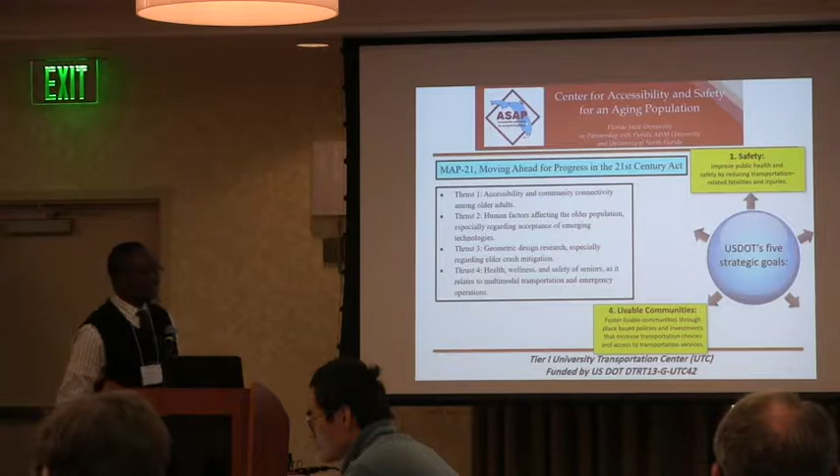I don't know if you're familiar with the legislative acts, but to get money in transportation, Congress has to pass those bills. The first one we got our funding under was called MAP 21 in 2013. We applied and focused on 2 of the 5 areas: safety and livable communities. Based on our proposal, we focused on 4 areas of research: accessibility, human factors, geometric design, and health. We focused on that, and based on it, we actually did our projects.

Our center was based on a very strong peer review of proposals. Each proposal had to be checked against all the MAP 21 requirements. You can see each of the projects had to satisfy at least 1 or 2 of those criteria. The reason is that we are engineers primarily, but we need to work with other people to accomplish this. That was the first cycle.

This is the second cycle, and we just show you a sample of projects. Some of them had other parameters that were not part of the formal requirement, including things like emergency evacuation, innovative transportation strategies, and improving methods for simulator studies.

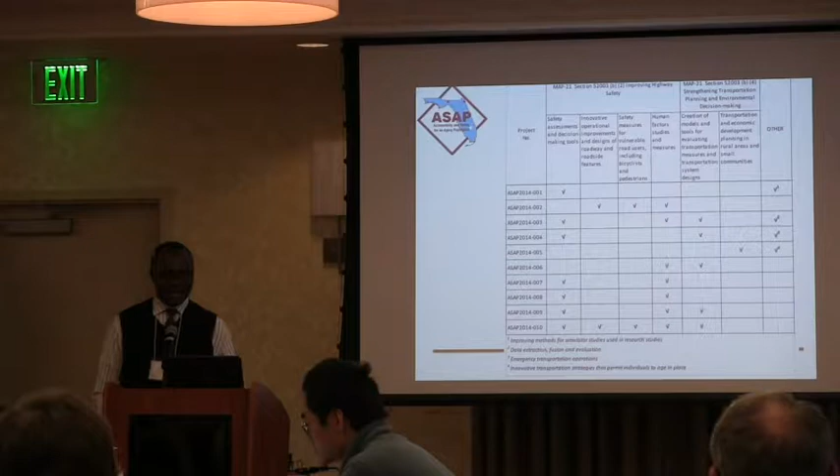So we went from MAP 21, which was enacted in 2013 and expired I believe in 2015, to the new act called FAST, the Fixing America's Surface Transportation Act, which gave money for new centers and for spending on transportation. We remain with the 4 thrusts of research areas, but overlaid it with new priority areas, and these are the ones our center is working on.

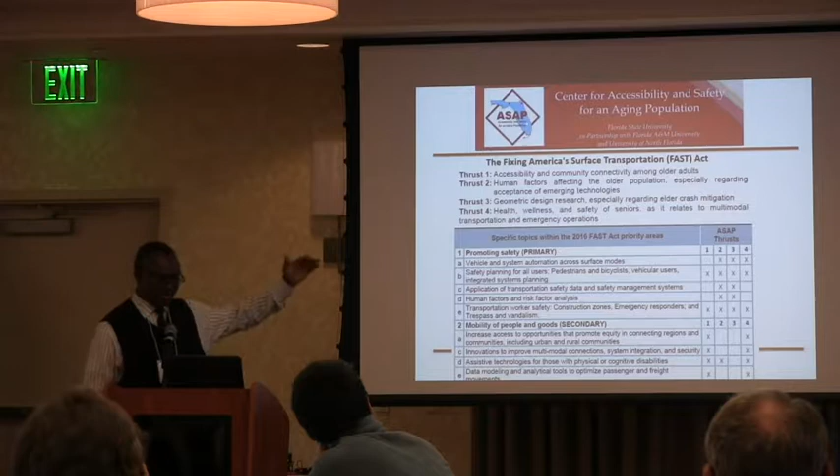Now, technology. We've done a lot of projects, but I'm going to focus on a sample of the technology-based research. One is the 3D transportation safety models, looking at complex intersections and how aging people are able to interact and identify risks at those kinds of intersections. We formed a sophisticated 3D model of a real-life intersection in Tallahassee, which was very complex, with elevation changes and turns. We input that into a driving simulator study to see which areas make aging drivers uncomfortable.

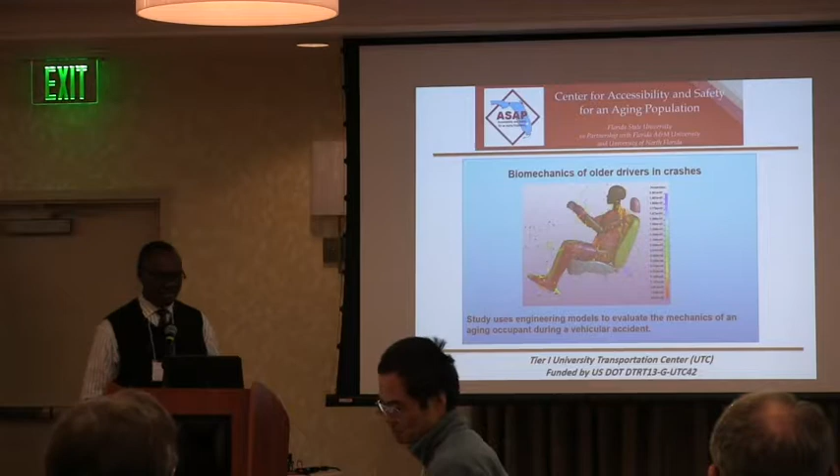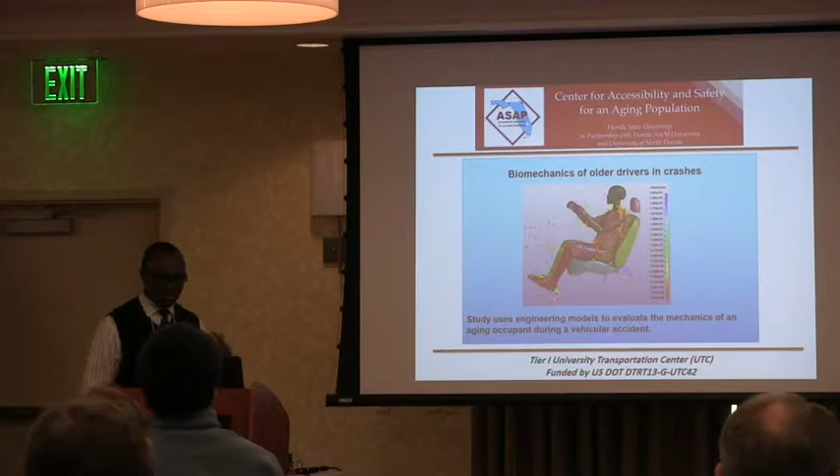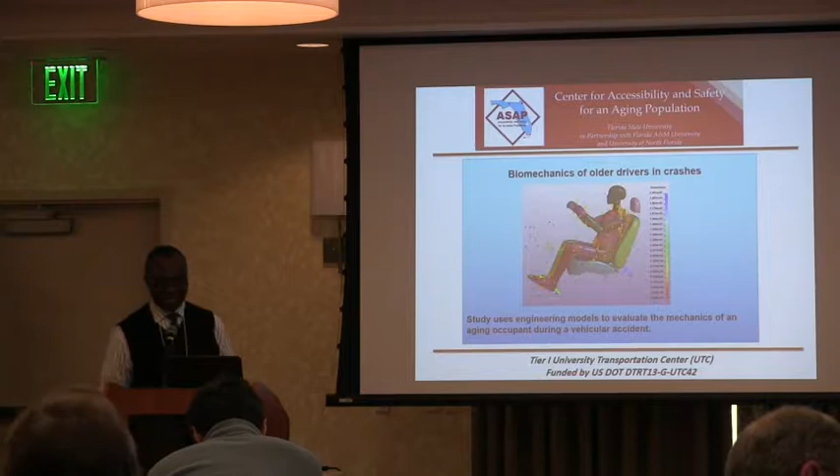We also did research mainly toward the biological area, a biomechanics study. We formed a structural model of a human being, including all the organs, and subjected it to collision simulation to see which parts of the body are more vulnerable. We only did one big project so far, with a PhD and a master's student working on this. We intend to extend it, working with medical people at FSU.

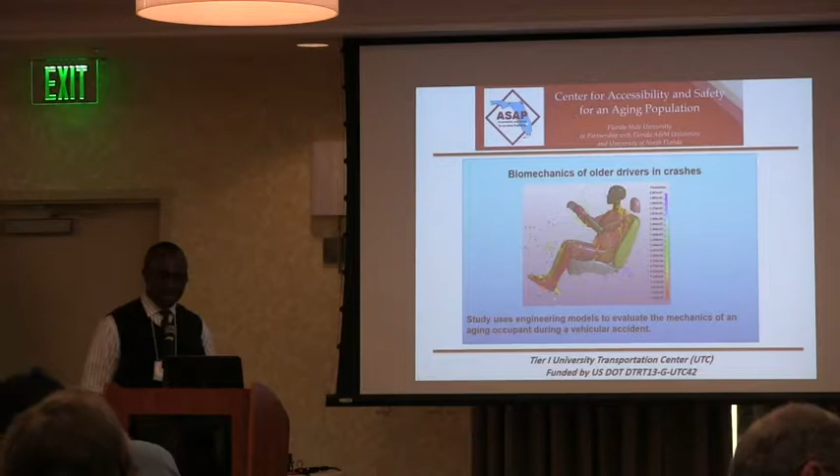We're finding out that the way you apply a seatbelt in an aging person may be different from a typical human being. So that's one of the findings. We have the report on our website.

We also did research on what they call cutaway transit buses. We have a very complex engineering model that we subject to collision, turnover, and rollovers to see what could be improved to help aging people who are occupants. I wasn't directly involved in this, but the reports are shown on our website.

And lastly, connected vehicle, automated vehicles. We also do a lot of study. I'm involved with four studies actually that are focusing on this.

Like Herman said, connected vehicles, people use these terms very loosely, it's not really well defined. A connected vehicle is one that has to communicate with either an infrastructure like a traffic signal or a roadside unit that will tell you where you are, what to do.

Or you could have an automated or autonomous vehicle, like the Teslas, that do not need any assistance from infrastructure or anybody. What they do is they have a LiDAR, they scan things and identify them quickly - this is a human, this is a goat, this is a car, what do you do? So, but we also have a connected automated vehicle, meaning that they can be enhanced by communicating with other cars or infrastructure.

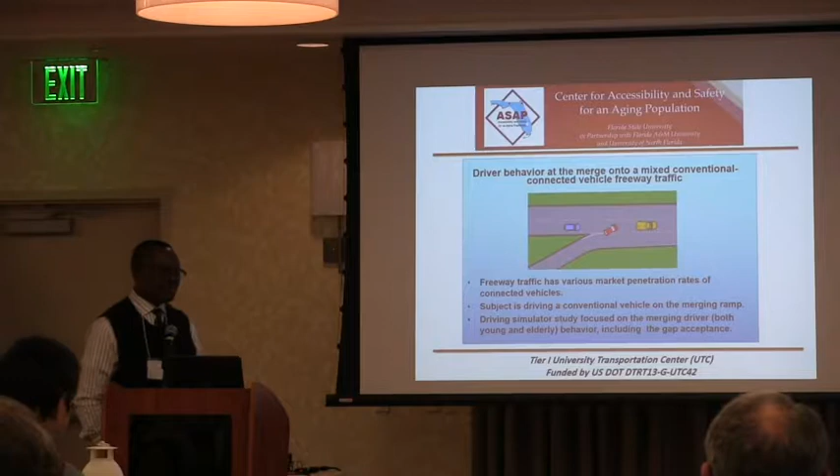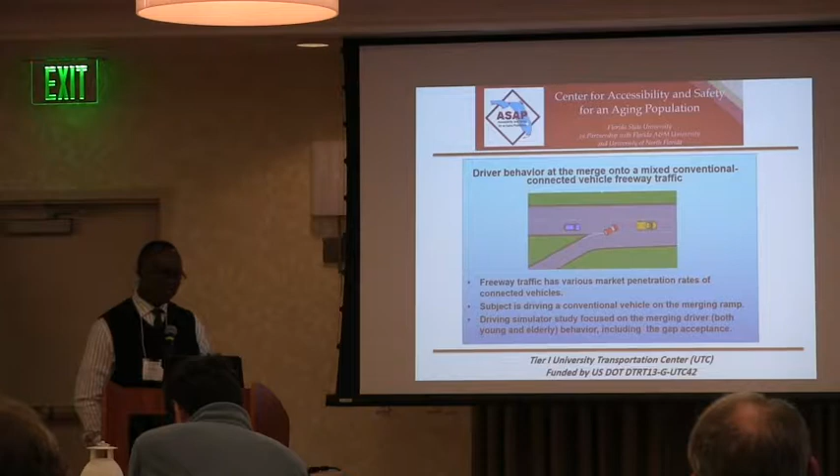This project is something that we just finished in December. The idea here was to simulate a traffic of connected vehicle. But reality is, as David said earlier, it's going to be even difficult to have 100% connected vehicles in the traffic stream. For the next so many years, I'm thinking 20 years, it's going to be mixed traffic, meaning there's going to be conventional vehicles mixed with automated or connected vehicles.

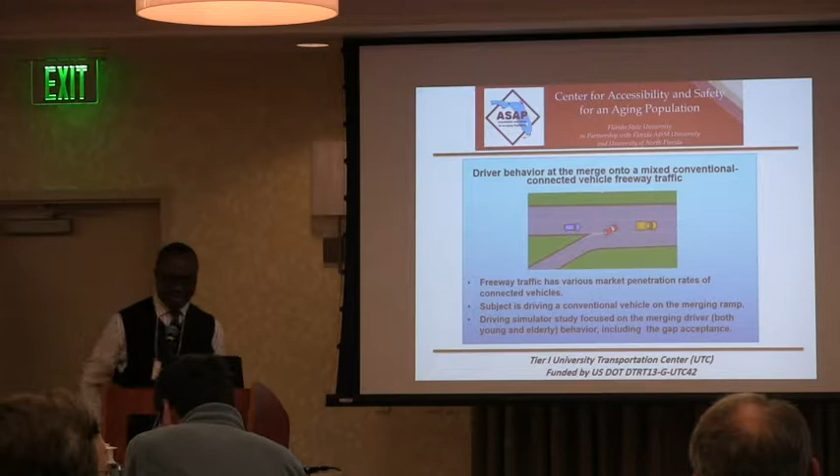So what we say is that now we don't have any real life data set. I know they have this Mcity in Michigan, but you cannot see a real traffic made up of connected vehicle or a mixture of connected vehicle and conventional.

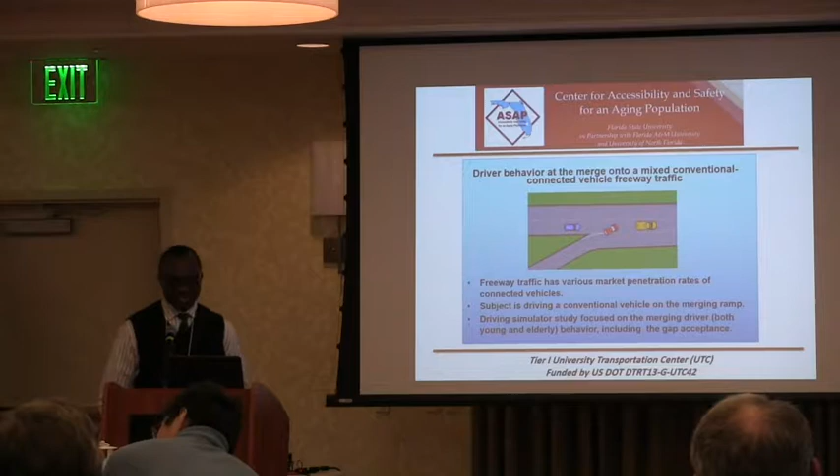So what we did in simulation, in this case the driving simulator, is to actually simulate the traffic on the freeway and try to identify the problems or situations that an aging driver or a regular driver will have trying to merge onto that freeway, which is a very serious issue because many crashes occur in those situations.

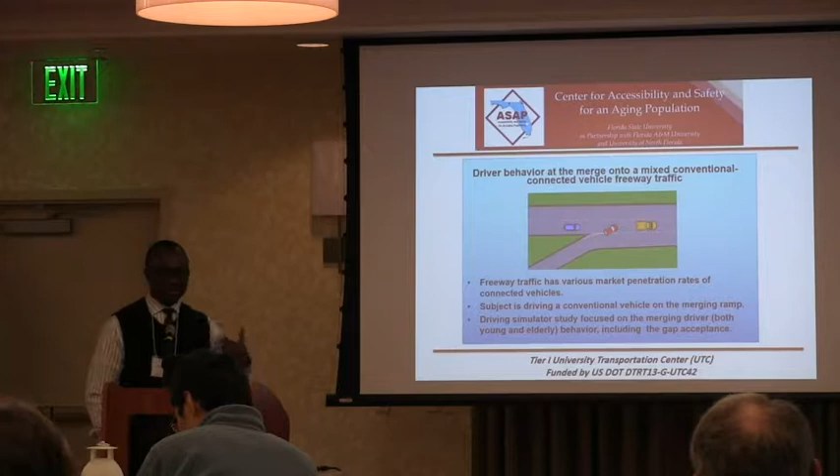So what we try to do is build what they call the penetration rate. It's basically a fancy name for how many percent of your traffic is connected vehicle. Let's say everybody's connected, that's 100% penetration rate. If it's zero, that means it's all conventional vehicles.

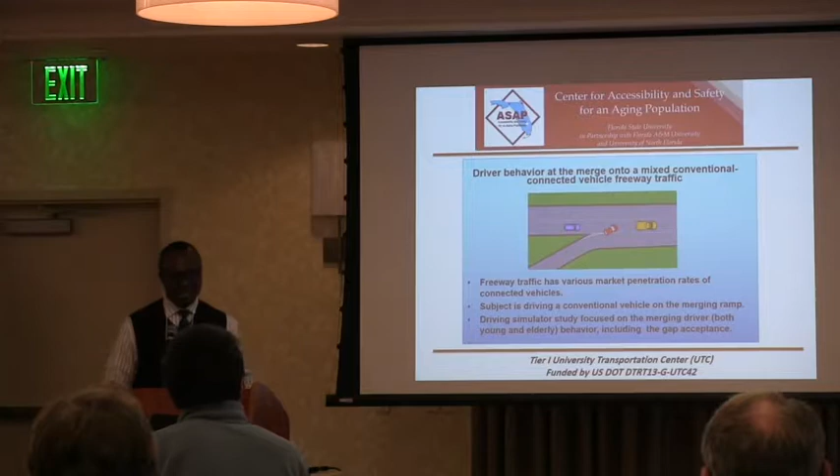So what we do is the subject driver is one merging onto the on-ramp onto the traffic, and that will be the driver on the simulator. Then we also look at the acceleration and everything, and we look at the vehicles, how they're behaving on the main freeway.

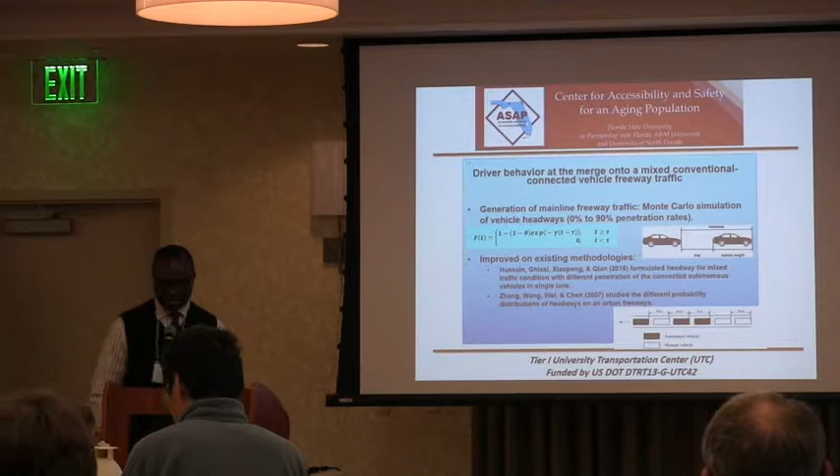So what we did was look at what has been done so far. Some people have actually been working on this, mostly technical or mathematical or theoretical, doing simulation models, and the idea is to see what they call the arrival rate or time between vehicles. The assumption is typically when vehicles are random, it's exponential time between them.

If it's 100% automated vehicle, it's going to be like uniform, because the idea is connected vehicles can stay closer and maintain that gap or headway between themselves. So we mathematically simulated vehicles on the freeway, and on the merging ramp is conventional vehicle.

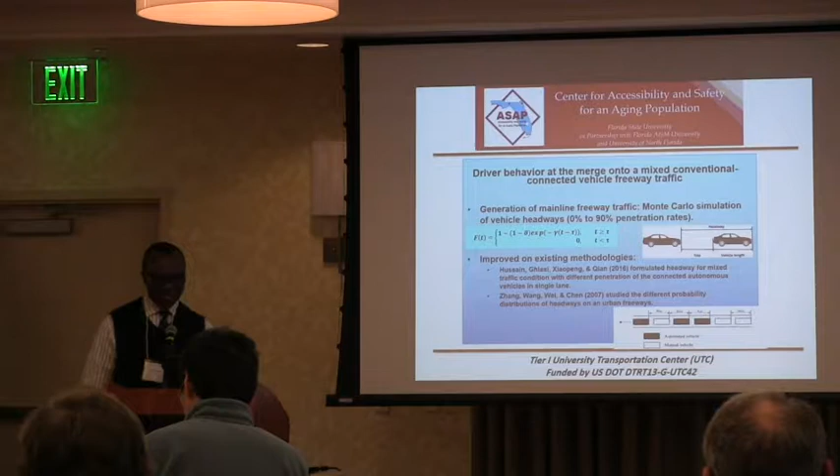You're going there because you have to make decisions, and we're trying to see your decision-making attributes. So we generated those vehicles, and like I said, there are some mathematical models or papers written on this - you can see the one at the bottom. You can have a situation of connected vehicle following a manual or conventional, or each type being the same. So we put that into the simulator.

Basically we use a model called the DriveSafety model. I think it's kind of in between - it's not very sophisticated and it's not very simple to use. So basically we look at that and we have three scenarios.

The first scenario was basically based on - by the way, we treated all the participants, went through the IRB and all the requirements - we actually looked at them and said, okay, without any driving, look at those vehicles passing and what do you think is the right headway or gap that you can merge into the main traffic.

So we collected that data, and then we actually made them drive. The second scenario was driving, whereby every vehicle on the freeway was conventional, a regular vehicle, because I know people have done this research several times on that. The third scenario was to actually add in 50% connected vehicles.

You may be asking me why not 25, 75? Because of the time for simulation. Even this study took around 50 minutes, which everybody knows is a long time to be in front of a simulator because of the sickness. So we had to limit it to a 50% penetration mix. In the future we'll try to find out, maybe we can reduce some other things and make it with different numbers of penetration rates. So if you're familiar with simulation studies, this is how we developed our scenario.

We have some trigger points where we collected the data. The main thing is we look at gap distance, gap headway. That was the main thing, because if you don't select the right headway to get into traffic, there could be issues with collision yourself or with people behind on the main traffic.

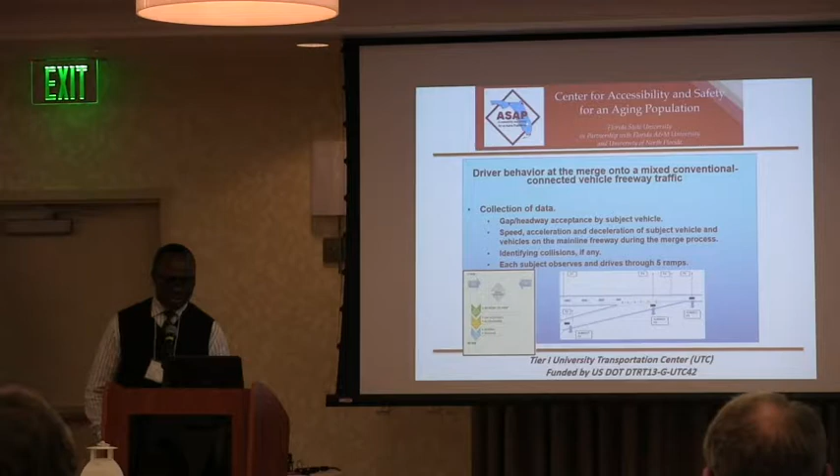And the result is, sorry to crowd the slide with all these results, but so far the only major difference we saw, I can conclude, is that we have people who are able to accept a lower headway. Let me go back here.

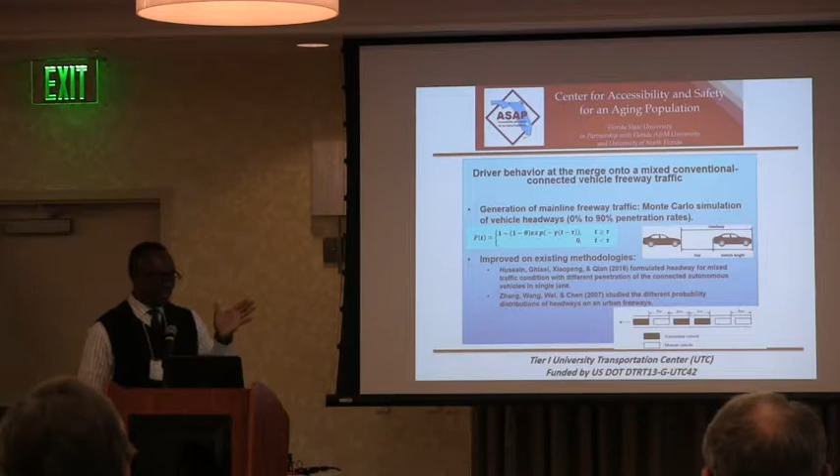A headway is, there are two things. A gap is the distance between the tail of the front vehicle and the front bumper of the following vehicle. A headway is the time — let's say you stay on a spot on a freeway and you see when the vehicle comes, and then the time the next one comes to the same spot, that's the headway in seconds. So that's what we actually captured in the study.

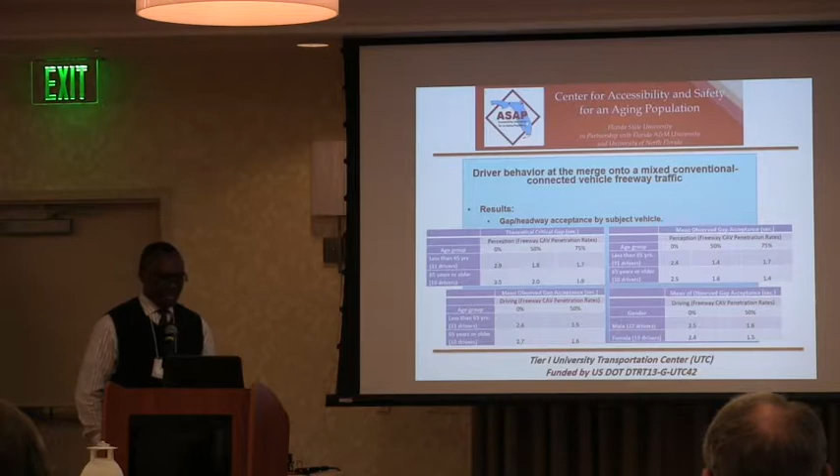So basically we have different averages. The first box on the left is talking about what we call a theoretical gap, because we can collect data from what you perceive and say, okay, let's create some model theoretically, and we'll calculate what we call a critical gap. The gap meaning that beyond that, anything smaller could be unsafe. And then we actually have people drive through and see the gap that they actually chose to go with, conveniently.

So those are the averages, and we also did some ANOVA tests to see if there was any difference. There was no difference. The main thing I can say as a difference is that when there were no connected vehicles in the mix, people had the luxury of picking larger gaps or headways, but when you actually have more connected vehicles, the gaps reduce, and they were still able to get in at a lower headway. But as you're going to see, that was the main difference.

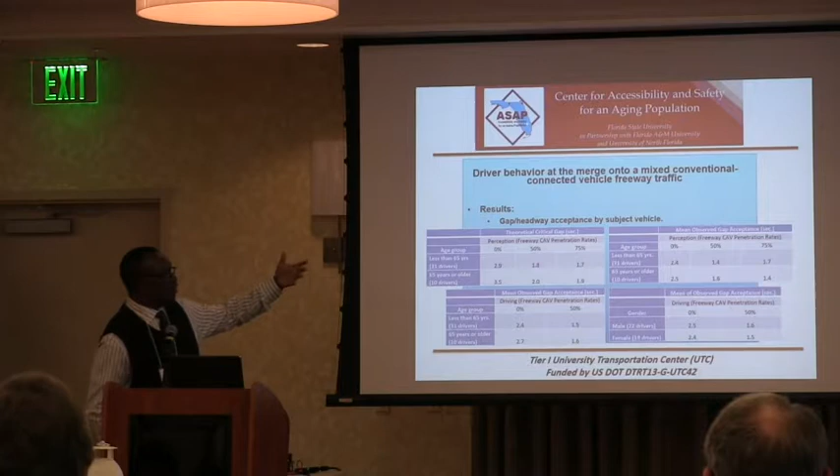We also looked at the difference by gender and by age, and you can see there are some slight differences. I cannot read from here, but the older drivers preferred to use a gap that's actually larger than what the younger drivers were able to use, because of the aggression of the young drivers. The other differences are not very significant.

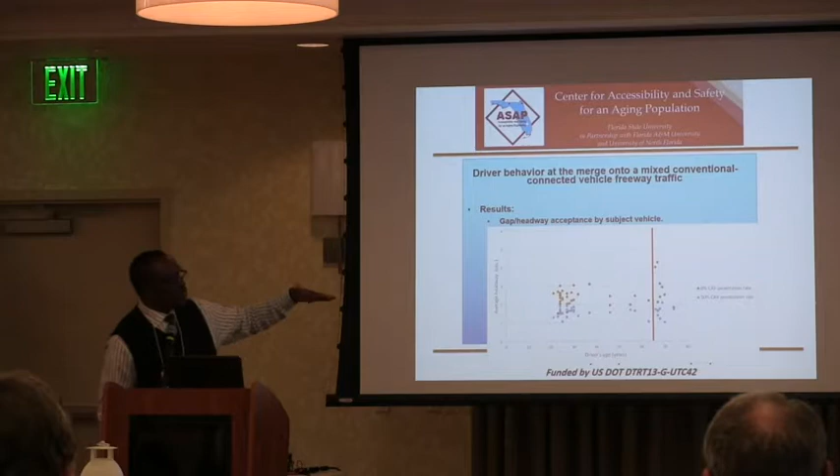We also looked at everybody's average over those 6 ramps and saw how much gap they accepted. As you can see, the blue dots are for the 50% CAVs, meaning half of the vehicles on the freeway were connected vehicles. You can see people were able to accept gaps that were smaller.

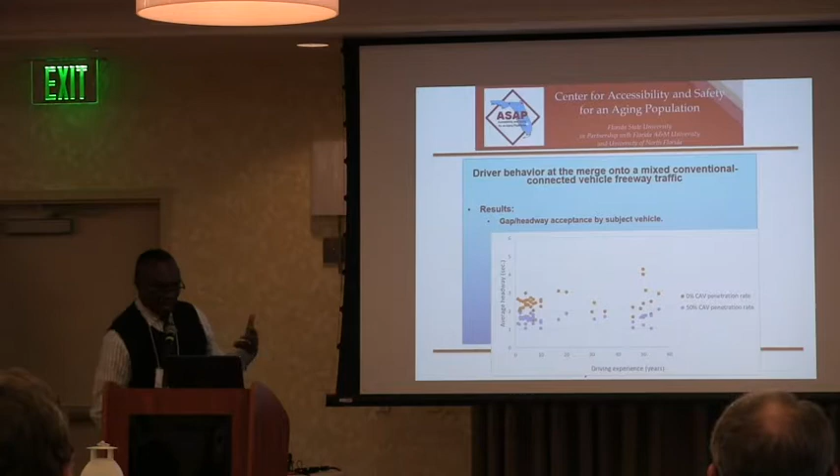We also looked at driving experience in years, because in the questionnaire we asked how many years they'd been driving. Again, the clusters were just similar — it wasn't significant. But more importantly, there's the data we got.

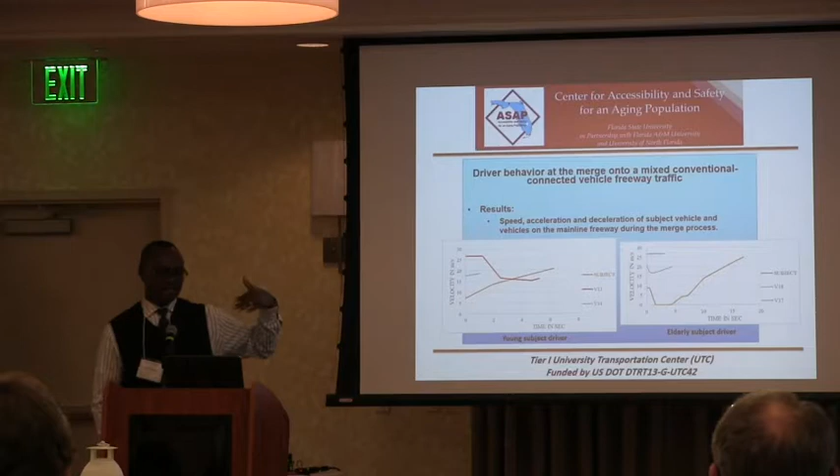We still have to analyze this more, but what this data is showing me is what I call the ripple effect — meaning that when you merge onto the freeway, you may be able to merge safely, but what happens to the vehicles behind the person you may have cut off? We're able to check those speed profiles of the trailing vehicles, and we also observed some things that we recorded.

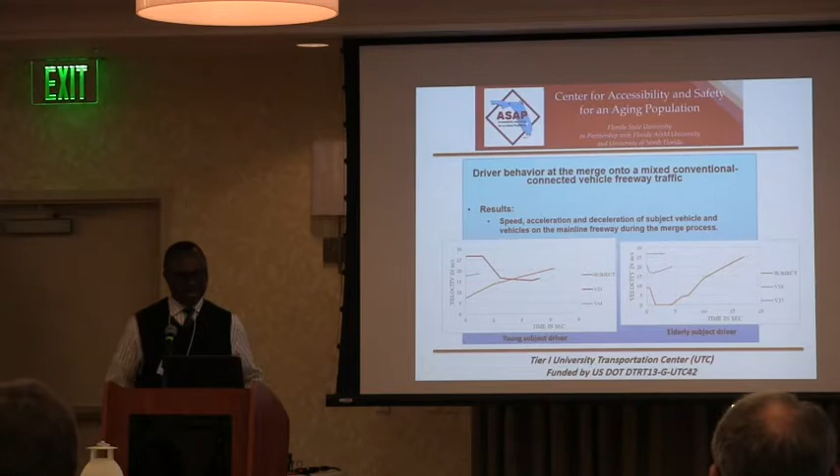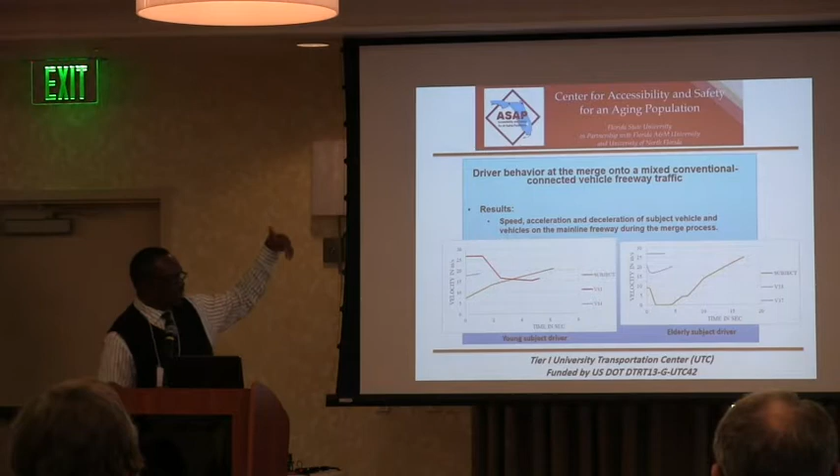Basically, if I can give you an example here, it's difficult to interpret the drawings, but if you look at the drawing on the right, that's for an elderly driver. You can see this driver, as they were going, actually stopped because they were hesitant before accelerating into the gap. Whereas this is a young driver who just went in straight, more aggressive. The trailing vehicle, the car that the young driver went in front of to make that gap, actually had to decelerate rapidly. So those effects were monitored, and it shows the effect of the aggression of the driver.

So conclusions, basically: people have a perception that they can go in at a lower gap than the theory, the estimate, shows. And also on average, both young and elderly drivers accepted shorter headways because they were made to do it. But there are some consequences in terms of safety concerns for vehicles on the roadway.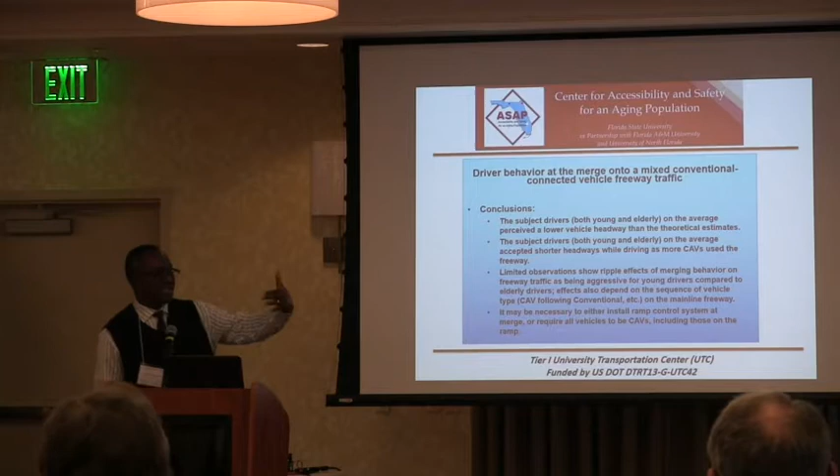Limited observation, because we have not analyzed all the data for the speed profiles, showed that even if you're able to merge successfully, there may be some consequences. There were one or two people actually having collisions between the vehicles.

And lastly, we don't have any mitigation solutions yet, but the main thing is that when you have automated vehicles on the freeway and it's not 100%, there may be a need for a good ramp control system for people merging on the on-ramp. Also, if there's a way, because everybody's connected, the driver on the ramp will know when to go, and the person on the freeway will allow that person to access the freeway.

So that was the story about the on-ramp. The other three stories we're working on have to do with traffic microscopic simulation, meaning you look at the stream of traffic and try to see how they're behaving - the density, the flow, the velocity. This is very theoretical, and we have three areas. We use what we call VISSIM, a simulation tool that tries to simulate traffic throughout the day and tell you how much congestion you're going to have, or even crashes. So we look at three areas.

One is work zone - we want to see what happens in the work zone, with emphasis on both regular persons and elderly people, because in this software you can modify some of the human behavior characteristics to suit an older person. Another is intersections, and the last one has to do with capacity, which we're working on and will finish sometime this summer.